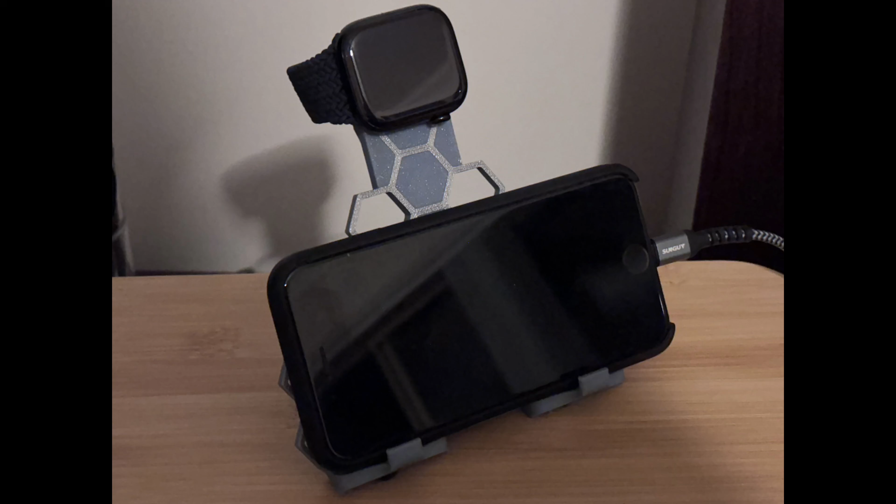In this video I'll show you how I designed this cool Apple Watch and phone stand, and I'll make the designs available free on MakerWorld.

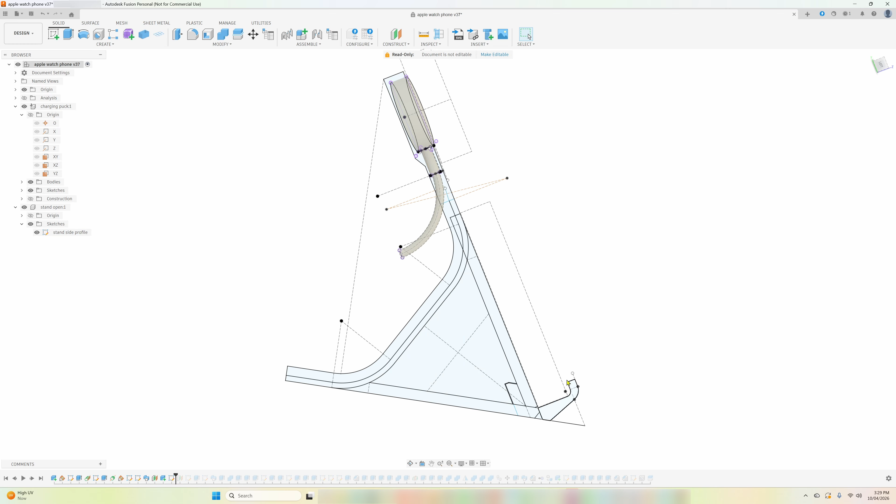And as always, I like to start off with the parts that the stand's going to interact with. Here's the Apple Watch charging puck. So the main design of this one is to make it easier to print, doing it in a few parts. So this is the side profile, and we've got the cable channel here, and then the feet for holding the iPhone or other phone here. That's the angle that will be printed out in.

So that's the start of the legs for holding the phone, and they're just simple extrusions on the side. So it goes from a straight edge here, and we just cut that out to make it a thinner leg so it obscures less of the screen. For a phone, we want this to be wide enough so that the phone won't just rock about and fall off. So we extend the side wing here.

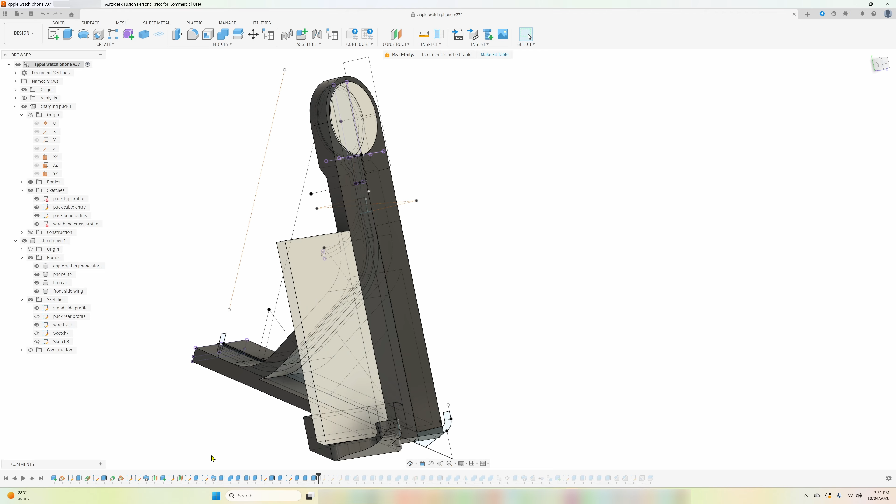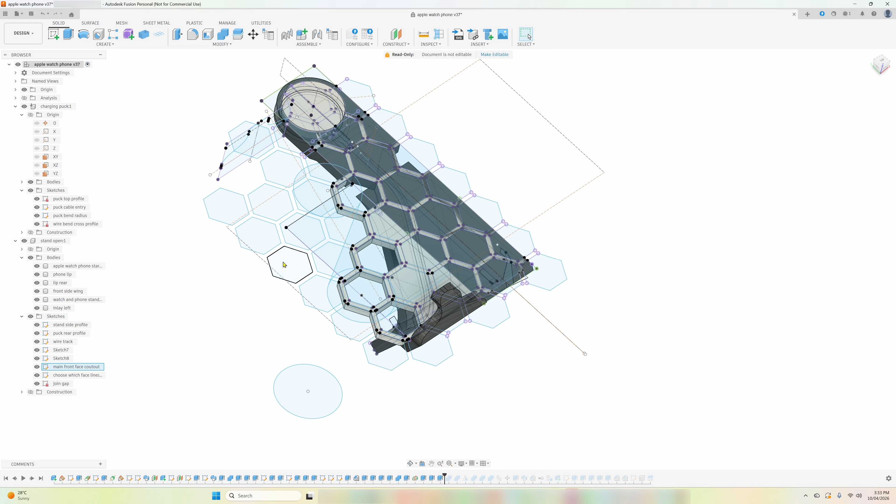So what I've done is I've laid out some hexagonal patterns on the main face, like so. And then we can use that to extrude some holes to give it a little bit of interest. So we also have to fill up some of these gaps by extruding those. So what we've got there is a cut, and that's just the 2 layer heights of thickness. And by splitting that off, what that'll allow you to do is to print this out multicolour, and then we just mirror that for the other side.

So we've got the inlay left, centre and right. So you'll see there, if I just zoom in that a little bit, you can see that there's space for that inlay to sit in. Now it's probably better to do this on an AMS unit so that you can have the colours joined. Otherwise you're going to have to glue in the inlay if you printed that separately. So then we mirror the other leg.

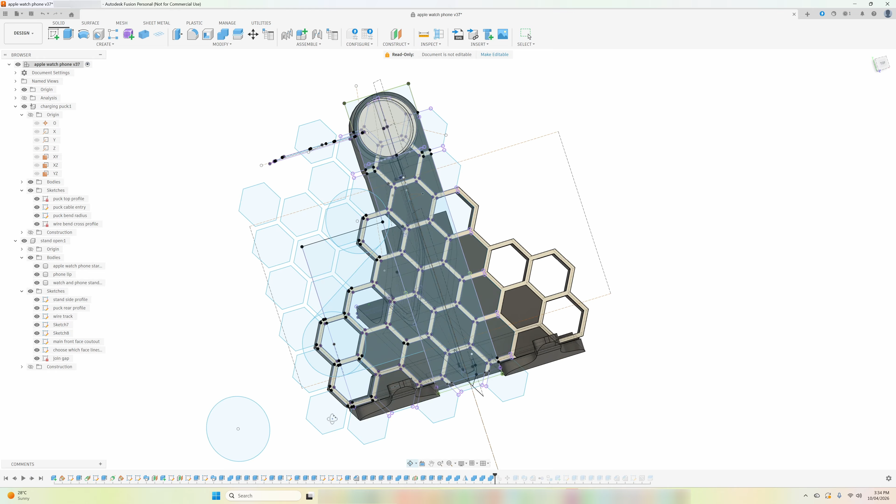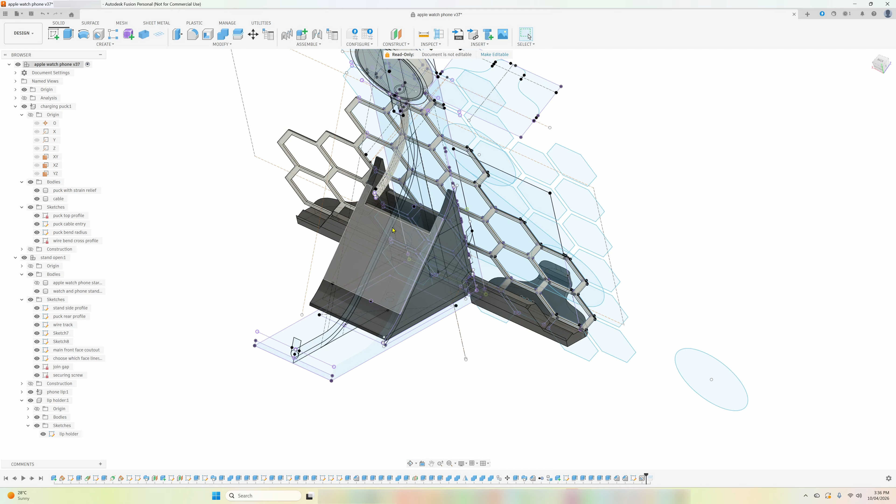We could leave that space open, but to stop the cables wanting to move the devices about, it's good for this to have a little bit of weight to it. So what we've got here is the start of a container. And what I did for my wife is put some nuts and bolts in here. I didn't have this on my wife's one, but I've just added in a screw hole here, and that means it will keep this insert here, fill it from the top, and it can slide in and out. And then the design of that is it has to have a little bit of a cut out here so that this can slip out past the feet.

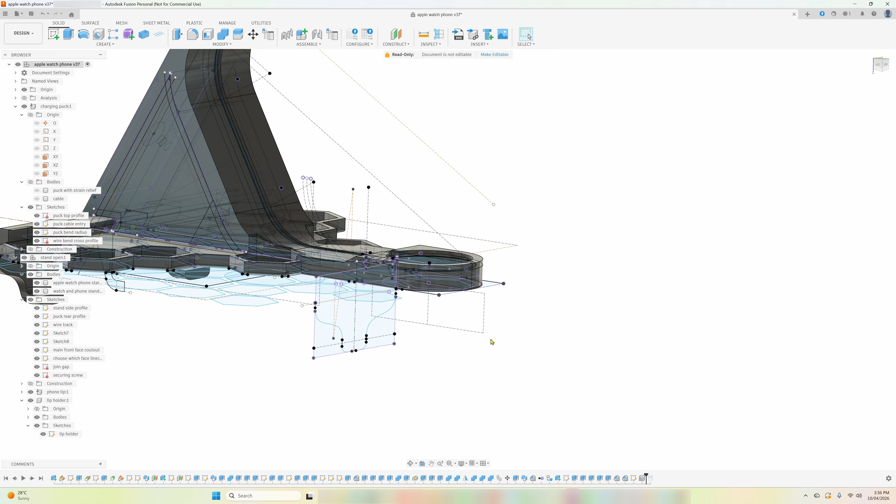Just take out the puck for a second. Then we see here there's a little bit of a lip here. And because this is getting printed that way down, I've got a small lip rather than filling this up, because otherwise you'd need extra support. So that just enables this one to be able to be printed in that orientation, and with little overhang, that's fine. So these are split into 2 parts so that you can colour these independently.

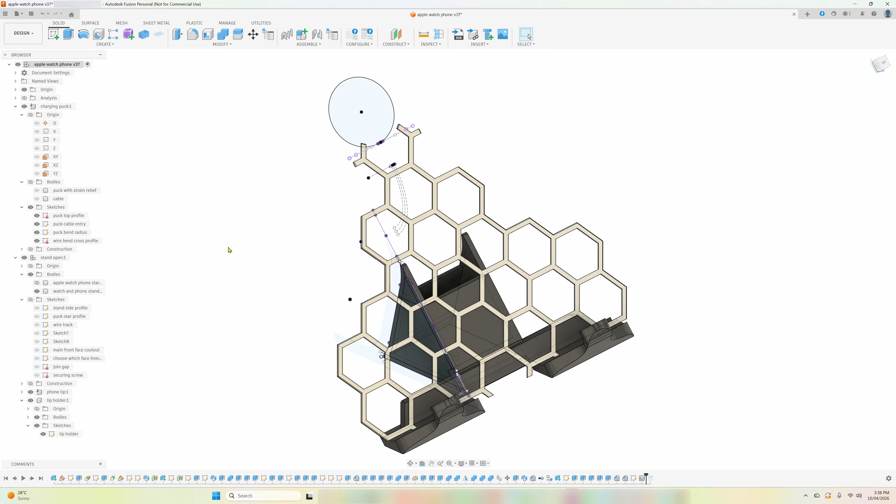So you've got the rebate cut out here, so you see the shape for that. And if I just switch that other one off, now you can see the inlay that's separate from all the other parts. So technically you could print this out on a non-AMS and just colour this one, but you'd have to super glue it in, something like that. So you don't get as nice a finish, I don't think. The other thing you can do is, since there's only like 2 layers for this inlay, you could print it out with a colour for the first layer, then switch to the other colour and do the rest of it in that same colour.

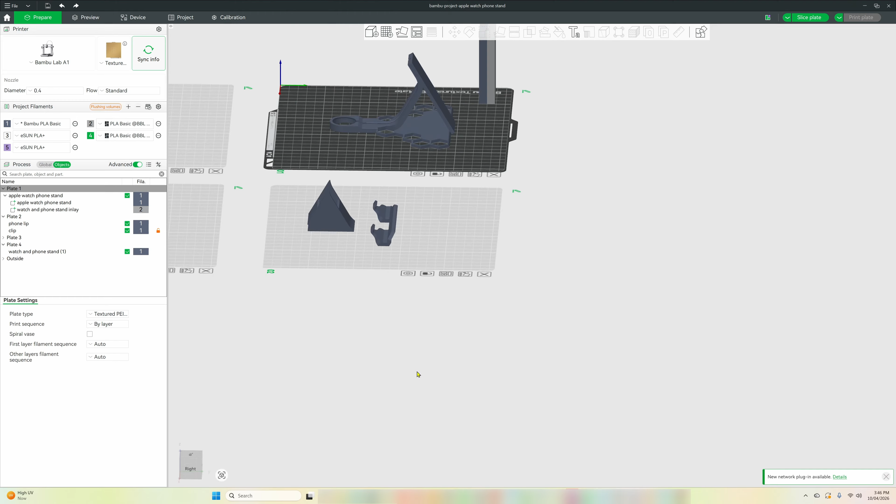What's the benefits of doing it this way? You have nice strong legs here, so that prints out that way. Without having those feet here, that means we can print this out in that orientation for the main body, and then the inner bit will print out vertically. You can see the print orientations, you can see the colours of the 2 parts here for the main frame, and we should have a hole in the box, check that. The countersink here, and I made that a little bit extra large so that this won't damage any surface when you put the screw in, so this screw should sink in.

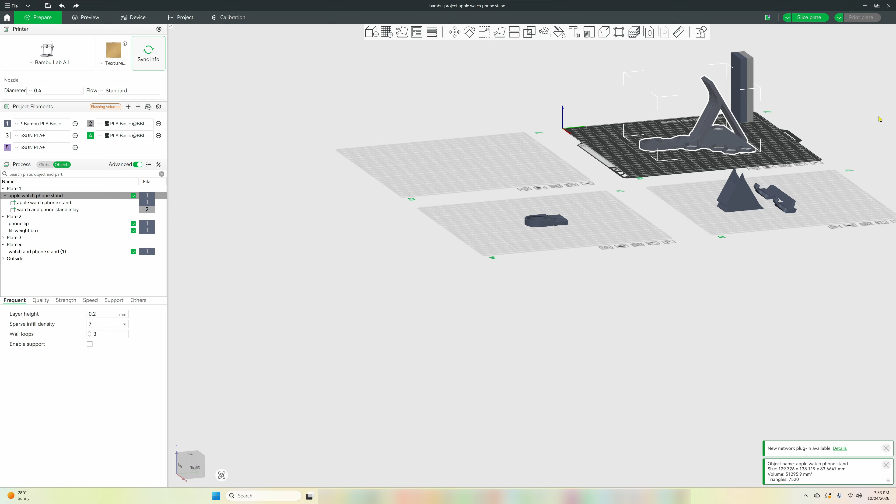We've got a test piece here that you can print out. Last thing you want is to print out a model and find out that the puck that you've got is a slightly different size to this one. 1, that you can print in this orientation, 2, that your watch is going to fit, and 3, the cable is going to fit in there as well.

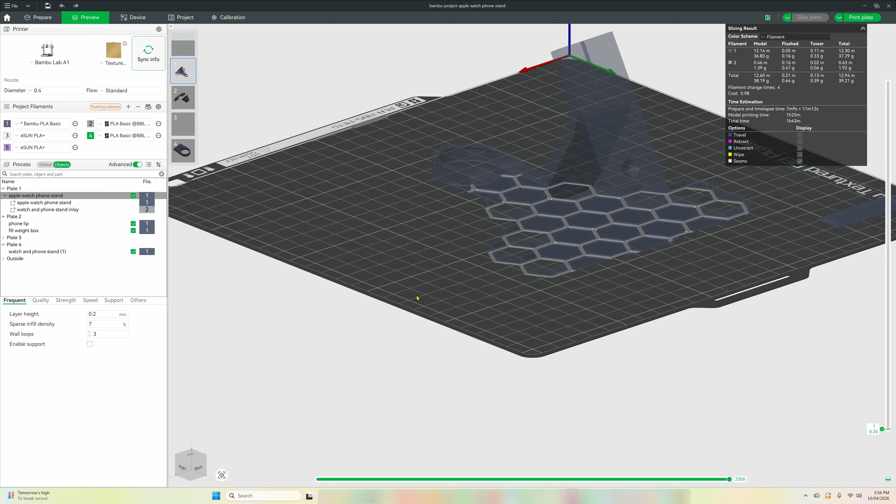So what kind of settings we've got? So we've got different filament colours for these 2. So we've got 7% infill. Let's slice that and have a look and see what that looks like. It's that rectilinear infill, I think. Okay, so we've got the 7% infill there. So you get to choose which layer height you want. If you do 0.2mm layer height, you're going to have 2 layers for that inlay. Yeah, rectilinear infill. There is no support needed for this one.

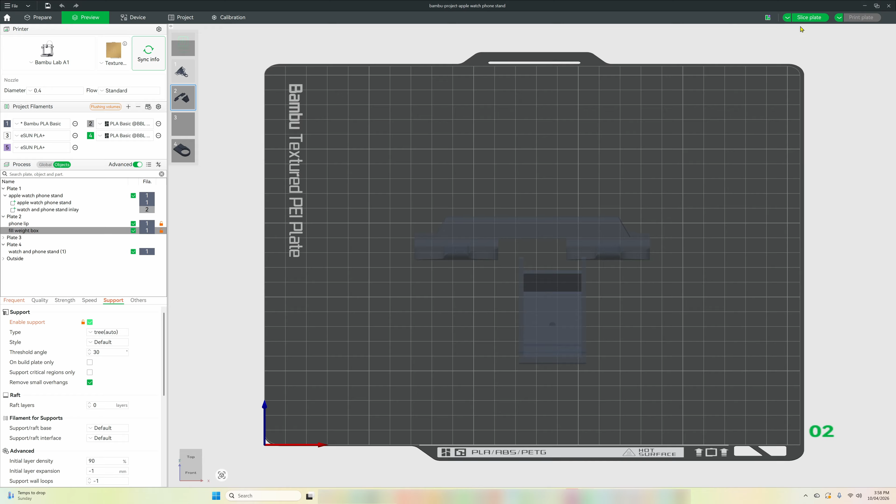Let's have a look at that lip. So that's printed in that orientation to give it some strength. So you need a little bit of support for this one. Let's slice that one and see if there's any supports on here. Nope, no support. It's that tree auto. What about the other one? Tree supports, slice that one. A bit easier to see. And double check some separation here. Yeah, those tree supports aren't touching. So we'll have a short prime tower here. So there we have it. The different parts of the model.

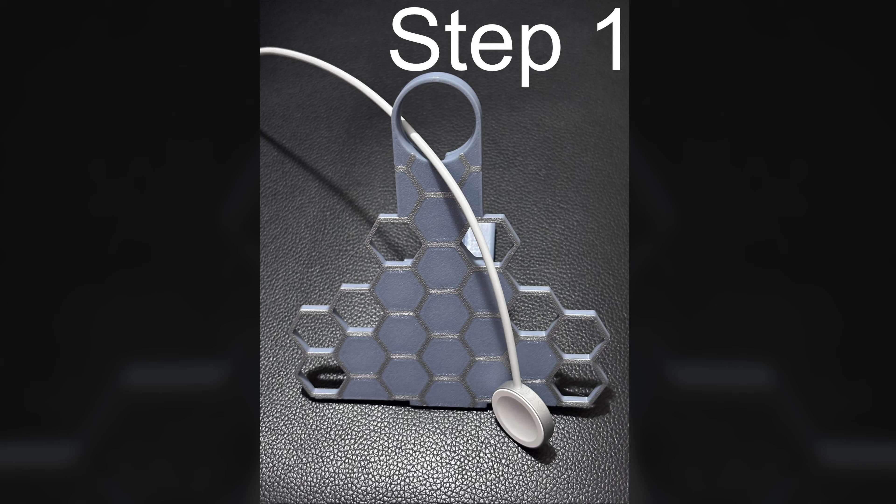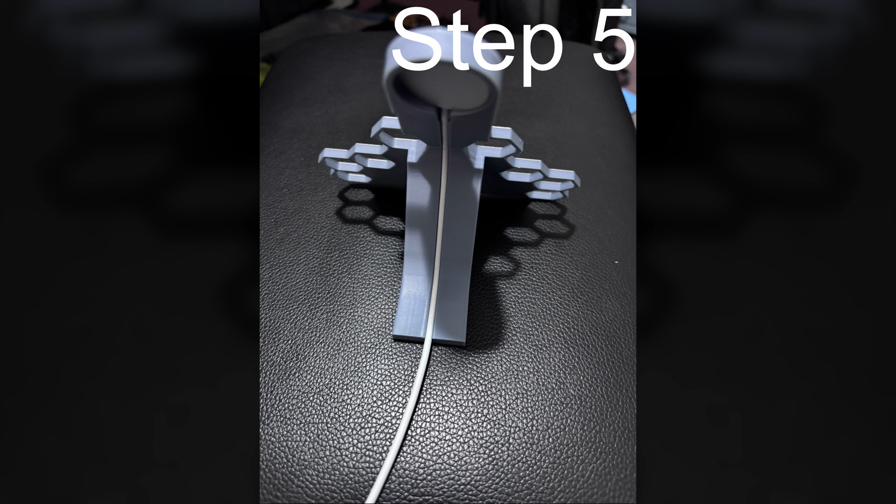So we slide the USB-C connector or the lightning connector up through the front of the stand, seating the Apple Watch puck there, and then finally just pushing it home. Then we press the cable in from the rear at the top, pushing it down until it gets down to the very end. Next we take the phone feet and slide that through and around through the triangular bit so that they sit like that.

Then we add some weight to the weight box. I just added some nuts here. And then we just slide that in, and then to secure we can put the M3 bolt from below. And you could always use that as a secret hidey hole for all your gold.